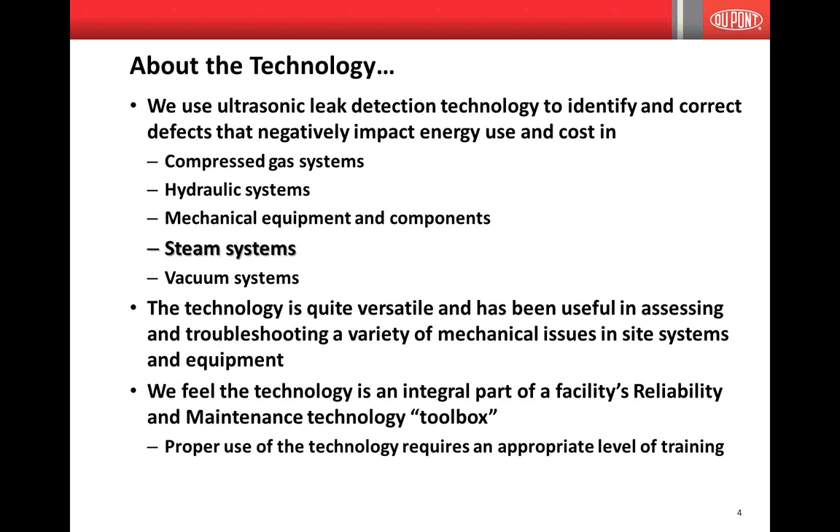So in doing this, the question we always ask is, who's looking at these systems on your plant sites?

In general, the primary purpose is to help our plants identify and correct defects. However, the perspective is more of a broader picture - items relating to other aspects of energy associated with these systems can be directly impacting manufacturing reliability, safety, sustainability, and mechanical integrity. Finally, we attempt to put into place the sense of awareness, the knowledge, and the tools necessary for sites to achieve the benefits and sustain the best practices.

So a lot of people ask what I do. Well, this is what I do.

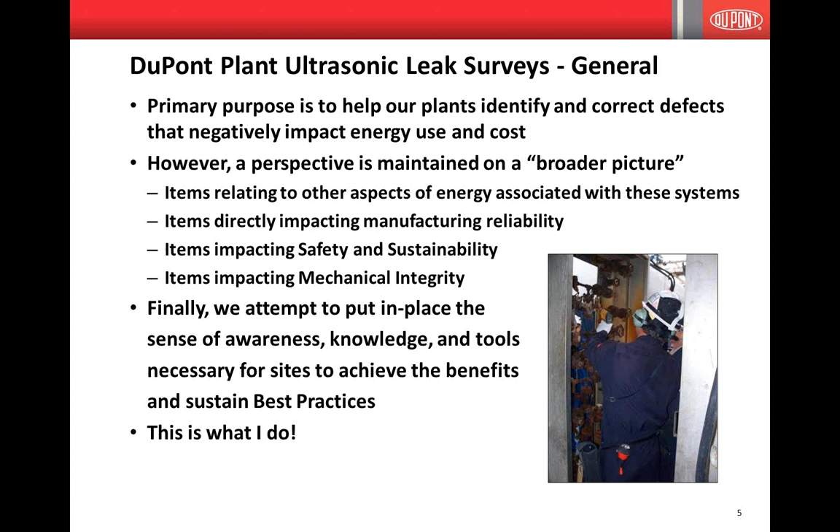The steam trap survey process can be very hectic at times. What we try to do is set up a steam trap database that's established and entered into an Excel spreadsheet. There are some computer-based programs out there in general that can be used, and there's a lot of good information you can get and store in computer-based programs, but right now, since we're going to so many different sites, and with the costs associated with that, we've decided to stick with our spreadsheets. Now, the spreadsheets we use can calculate everything that most of these computerized programs do, but it's a little bit different on the reporting side of it.

Typically, DuPont uses 2 of the 3 test methods for testing steam traps: sight, sound, and temperature. The two we basically use are sound, with ultrasonic leak detection, and temperature, which I use a little handheld infrared camera for. There's also contact-type spot infrared thermometers, but one thing when using infrared - you've got to watch the reflectivity off shiny objects, or you might not get true readings on temperatures.

But all the traps on site are surveyed. Again, I use intrinsically safe equipment - right now I have the UP9000 ATEX and the intrinsically safe FLIR infrared i5 camera. Once the defects are identified, I hang a red trap leak tag on the trap, and that's used to identify that there is a defective piece of equipment there. It also lets the people in the area know that there's an issue with this piece of equipment.

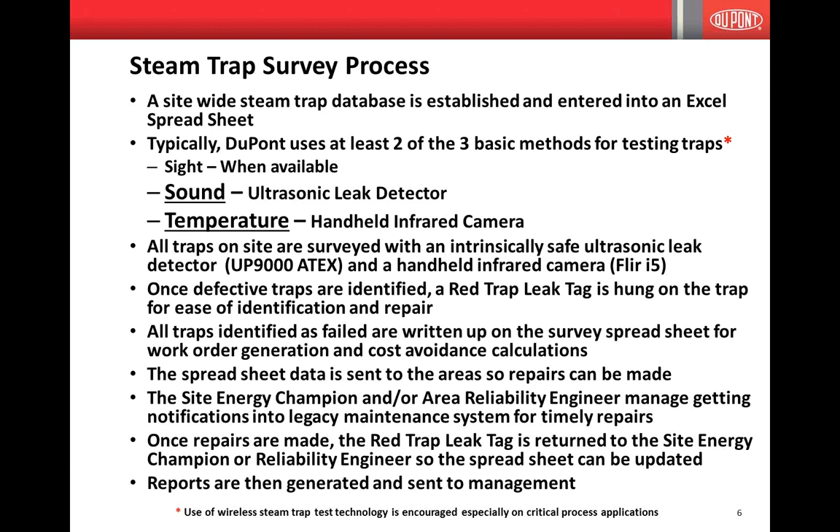Some of the equipment we use, like I said earlier, I use the 9000 ATEX, and this is basically the kit it comes with. Of course, I bought a bunch of fancy gadgets that go with mine for use within compressed air and steam traps - extension poles, flexible probes, and all. There's a wide variety of accessories that can be used with the equipment.

As you get more experience testing traps, or even doing compressed air leaks, you find needs for different modifications you may have to make, or make different things to assist you with doing your surveys. As you can see here, there are several detections, different leak detectors.

In this photo in the upper left-hand corner, you can see he's using a UP9000, but the headphone is not attached. If you can see my cursor passing over, this little jack plug is where the headphones should be inserted. I don't recommend testing steam traps without using the headphones.

In this case, he's testing thermodynamic disc traps, which have a distinctive on-off cycle. They can be very loud, and if you have your sensitivity adjusted a little too high with the headphones on and it discharges, it could be kind of uncomfortable to your ears.

You can still see the bar graph increase and decrease during cycles, but without the headphones, you can't listen to see if there's a leak in between cycles. A lot of times on disc traps, once the disc and seat start to get worn out, you'll actually pick up that slight leakage in between cycles, and that's when we start losing live steam.

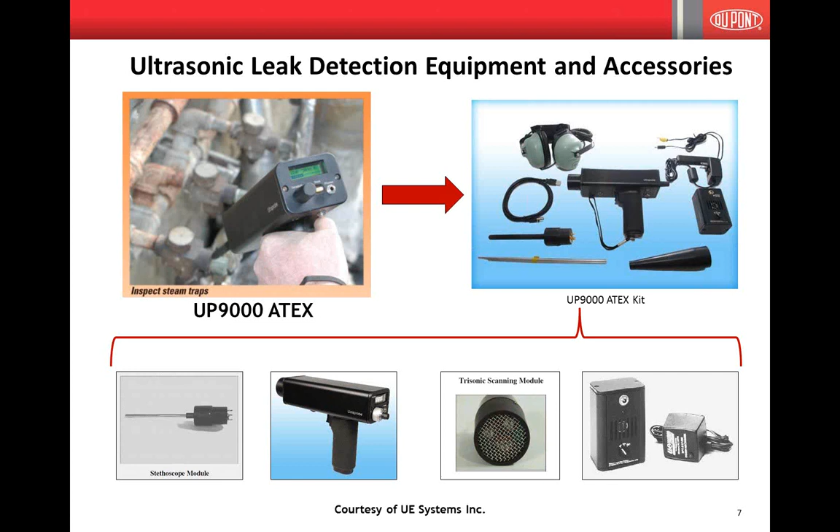On the bottom, you can see different scanning modules and tone generators that can be used for different types of testing techniques.

Steam systems within DuPont - I'm sure steam systems are not just for DuPont. Every plant site has them, every industry and business has them, no matter if you're a hospital, an oil manufacturing facility, chemicals, pharmaceuticals - just about everybody has steam. Everybody's going to have a steam generation facility.

There can be thousands of running feet of pipe within the steam distribution system, and hundreds to even thousands of steam traps on site. There's also a diverse mix of steam traps and trap applications, different pressures, different applications in the utilities and process areas.

In addition to the inefficiency and steam loss, other energy-related items associated with surveying these systems can include improving steam trap and steam condensate leak management via best practices. DuPont has an entire library of best practices that we use for any type of inspection, any type of program that we can use or have.

We're also assessing steam traps and associated steam and condensate piping. We want to make sure they're functioning - they can be failed open, failed closed, or any subset of the other observed conditions. We want to confirm the steam trap application, type, and installation. Visually examine the steam supply and condensate piping, the connections, the fittings, the insulation, and the ease and access of testing and maintenance.

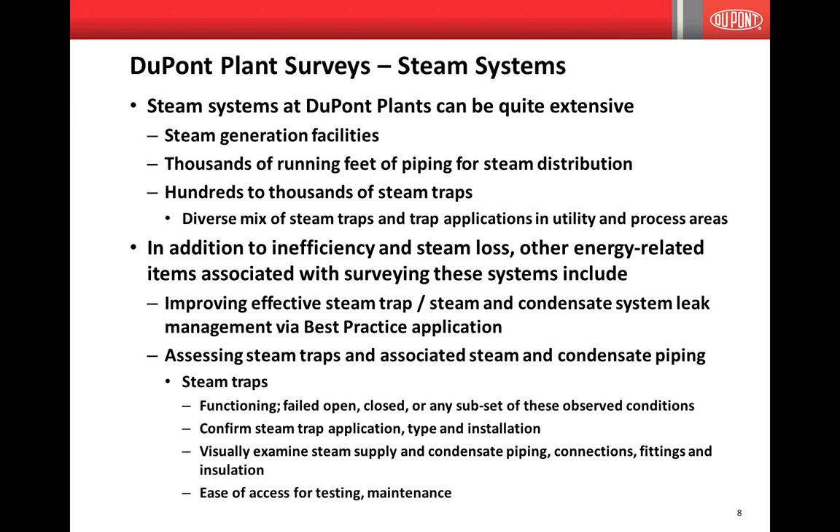Many years ago, we observed what we call the iceberg effect associated with steam traps and steam trap management. One thing we have to remember is that steam traps are only a small part of the steam system. But when we're having problems with steam systems, the steam traps are the first thing to get blamed that something is wrong.

In addition to energy-related items associated with these surveying systems, we also identify opportunities to reuse condensate in the area, like for flash tanks, heat exchangers, etc. Condensate is already hot, it's already treated, so you want to try to get that back to your boilers. That way you use less makeup water and less heat on it. So you save a lot of money by returning your condensate.

You also are looking to identify misapplication or poor utilization of the steam. These surveys also provide an opportunity to identify or assess potential safety design, system design, and mechanical integrity issues.

Safety, hydraulic shock, or water hammer. I'm sure if you've been around the steam system long enough, whether you've been at the plant for 40 years or you're on your first month, you hear some pinging and banging, water hammer in the steam headers. One thing you have to remember is water hammer is not normal. Steam systems should not be banging and hammering.

It could be because the system can't remove the condensate. It could be some traps that are failed closed. It could be an isolated valve that you can't see anywhere that might be leaking through or cracked open. There's a lot of different things that can cause water hammer.

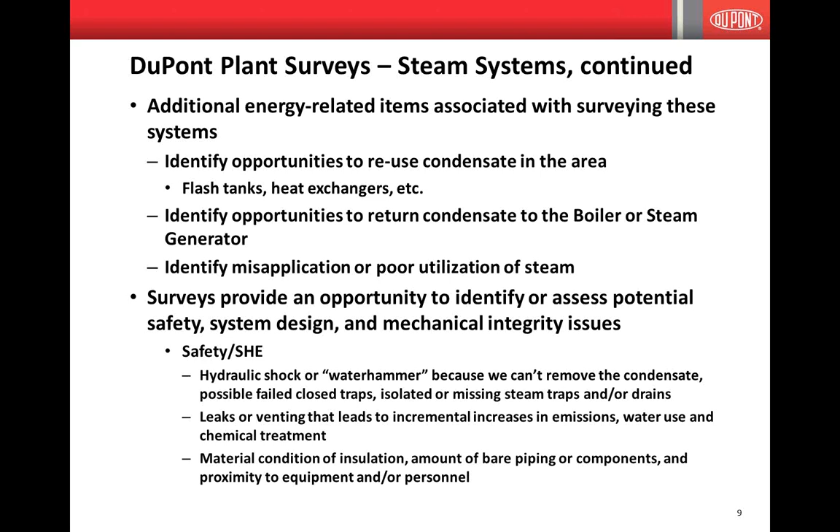When we start getting more water condensate in the systems, the temperature starts dropping, the pressure starts dropping. So there's a lot of issues that if we don't remove that condensate, we can have some serious equipment issues.

As far as mechanical integrity issues, system discharge points, flash steam in the proximity to personnel or vehicular traffic. You can have issues with thermal burns, either direct or indirect contact, steam plume or vapor clouds from flash steam and vented condensate, condensing vapor, pooled condensate, and potential for freezing.

Down south here in Louisiana, we don't have that issue that much, but up north, now that it's starting to get into the cooler season, we want to make sure that our systems are properly trapped and removing that condensate, because we can freeze up not only little tracing lines, but big steam headers as well.

There's a lot of noise associated with trap discharge and the erosion of the trap drain area associated with condensate discharge over time. Some mechanical integrity issues: you're going to have pipe and fitting corrosion, erosion from adjacent leaks or direct contact with other piping, and the location and condition of expansion joints, pipe hangers, and supports.

Some design issues can be adequate system or component isolation valves, sufficient system high point vents and low point drains, and adequate provisions for support and thermal expansions.

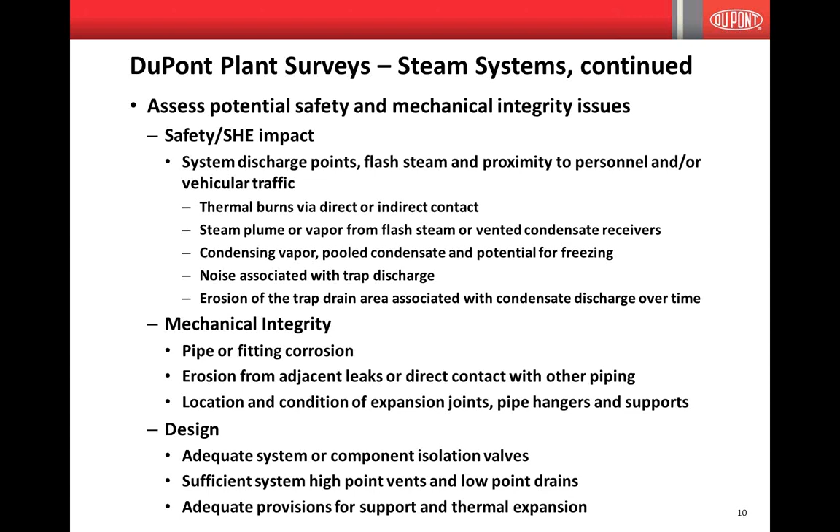During the surveys we also check for steam loss and steam leaks. The leaks add artificial demand to the system, or lose the opportunity of effectively utilizing or returning condensate, basically measured in pounds per hour. Leaks can lead to incremental increases in emissions, water use, and chemical treatment.

Pipe and/or fitting material conditions, material conditions of insulation, and the proximity to personnel. A lot of our plant sites are very old, and a lot of these old sites still contain some asbestos. So you have to watch when you're going around bumping insulation or removing valves or traps, making sure you don't disturb the insulation too much.

We look at the vents of flash steam in the proximity of personnel or vehicular traffic, again, which can cause thermal burns. Vapor clouds, once they get dense enough in the wintertime, you can't even see through them, so you don't know where you'd be walking. You could end up with a tripping hazard or something of that nature.

And the noise of the vented steam, which in some cases could sound like the space shuttle taking off. Mechanical integrity, the condition of the piping, the fittings, the valves, the packing, etc.

Again, we can document these things on a spreadsheet, where we're not only writing up a steam trap that's defective and getting a work order on that, but also writing up if there's a valve that needs to be replaced, or a valve packing leak that we can try to tighten up, or piping and fittings that need to be replaced as well. And the reliability aspect of it is, do existing mechanical isolation valves function properly?

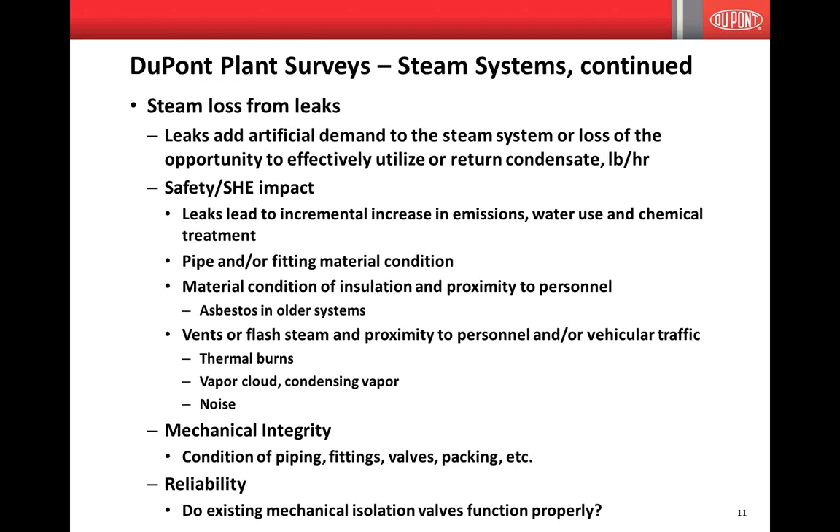The percent of steam trap failures - when we figure in failure rates, DuPont calculates the failure rate using only the traps that are in service at the time of testing against the number of failed traps that actually failed during that survey. I've seen some entities use the entire trap population versus what's failed, which can give you a false pretense of what you actually have going on out in your areas and in the units as well. What we like to do is make sure we get a failure rate of the traps that are actually in service.

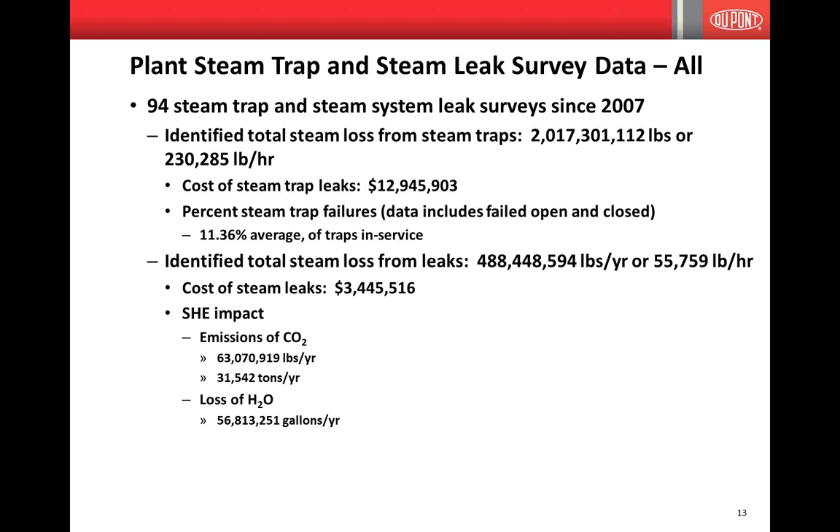Some of the charts I put together are since we started the programs and monitoring closely in 2007. You can see our failure rate chart. In 2007, it was an average of 14% failure rate. Some sites were as high as 35-40%. We didn't get below 10% on not many of them.

As we started getting in and putting the programs in place, you could see, like after 2009, when more and more sites started getting on board with the best practices and realizing there's a lot of low-hanging fruit, as we call it, as far as steam trap maintenance and repair to capture some of these wastes, you could see how the trend gradually went down over the years. Right now, on average about 2015, it's a little under 6%.

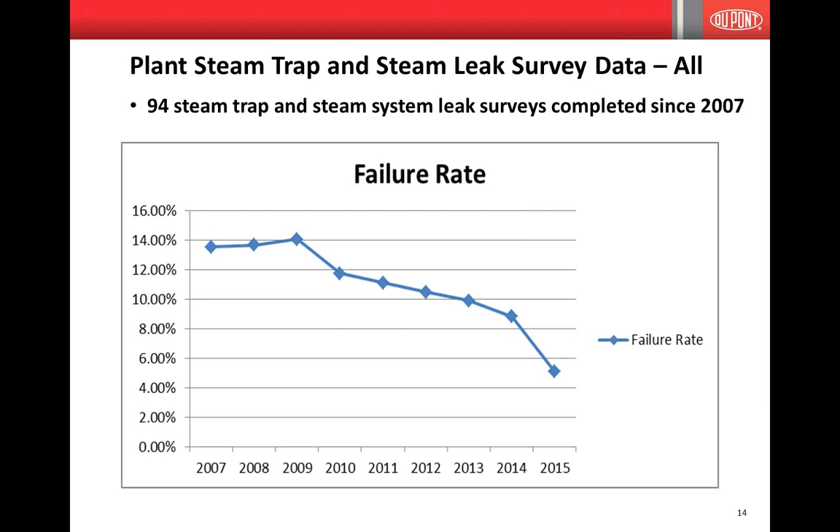We've only done a few surveys so far this year, so hopefully it doesn't get that much higher when I finish my next 6 surveys before the end of the year.

You can see the same here, the trend of the dollar amount loss follows the failure rate pretty closely. You'll see spikes in the trends with steam trap failures, most commonly during startup and shutdown of our plants. We need to have processes in place to blow down our steam headers and steam systems, because if we just start up and shut down without trying to remove the trash from the steam systems, we could basically just send that trash straight to the steam traps, and it's going to cause a premature failure.

So if we can put some processes in place when you're shutting down a steam system, get a group of guys together to have access to blow down the main headers, get all the sludge and trash out, and protect the traps by isolating them before you let all that trash go through. Same thing on startup: you want to purge your systems before you introduce that steam into the main process applications and to your main steam traps.

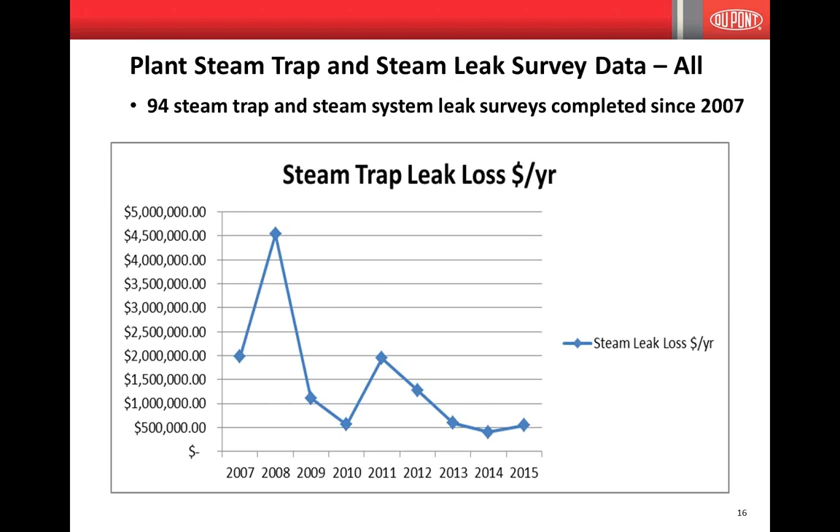Overall observations and defects: steam traps are a mechanical device. They will and do fail. There are two basic different types of failure modes: failed open and failed closed.

On failed open, we use three different leak levels on thermodynamic disc traps: full blow through, rapid cycling, or leaking. Within the spreadsheet we have a breakdown percentage-wise—if a trap is leaking it might only be wasting 30% compared to a trap blowing through at 80 or 90% of blow-through capability.

So we do get a little conservative on our leak rates. But when traps are leaking through, they're not operating properly and won't be efficient. This increases your steam use and/or loss of live steam, and increases your BTU per pound, a key performance indicator DuPont uses in tracking steam systems. We can also overpressure condensate return systems when a trap blows through into a closed loop system.

You're going to get water hammer and improper heat transfer, or the inability to maintain heat and throughput. If a trap is failed closed, we're not losing live steam, so we're not wasting money that way. But we end up backing up condensate into the steam headers and heat exchangers, causing poor steam quality and poor heat transfer, with possible water hammer. Once you start flooding heat exchangers, you get formation of carbonic acid, which causes corrosion and loss of mechanical integrity of the equipment.

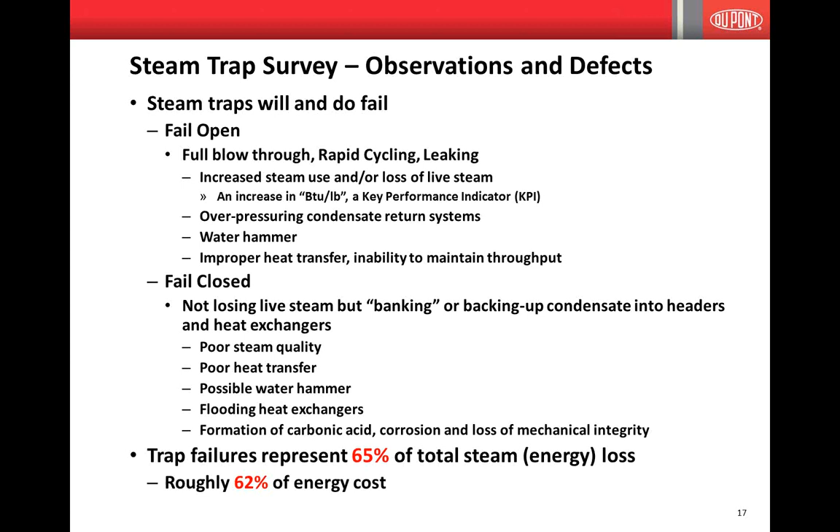Trap failures represent about 65% of the total steam or energy loss, roughly about 62% of our energy costs. Steam leaks represent about 35% of energy loss, roughly 38% of the energy cost.

Leaks from piping systems, fittings and joints include valve packing leaks, and strainer blowdown valves that leak through. A lot of people like to bleed off on the strainers before the trap to keep the system hot, but if we're blowing down steam before a steam trap, we're actually losing efficiency inside the equipment we're trying to maintain heat on.

We lose a lot of latent heat—the pressure drops, the temperature drops. So even though we see live steam coming out, it'll be hard to maintain our system pressures and set points if we're blowing down before the trap.

We'll see leaks at piping, tubing, fittings and connections. A lot of times tubing gets crushed, or fittings are loose and start wearing out, blowing through. It could be internal corrosion, external erosion, or friction from rubbing on pipes or tubing causing leaks.

Steam hose is sometimes used for surface heating instead of jacketed or tracing systems. There's a lot of waste when you open up a 3/4 inch steam hose just to blow it on a transmitter to keep it hot and keep it from freezing in wintertime. A lot of times the water on the transmitter will cause more headaches than it solves by trying to keep it warm.

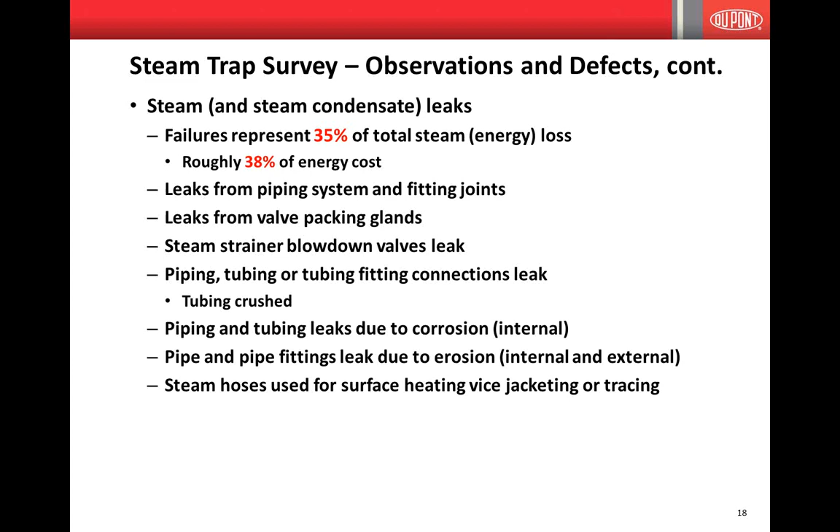Even with maintenance personnel, if they're not properly trained on how to install steam traps, they may take out a failed trap but install it wrong, putting it right back in the same way, and the trap will fail again.

If you're not familiar with each type of trap and trap technology, all traps are position sensitive when you install them, because they have to be in a certain position to operate correctly. So if we're not training our area personnel either how to test the traps or how to install them correctly, we're shooting ourselves in the foot by our lack of training.

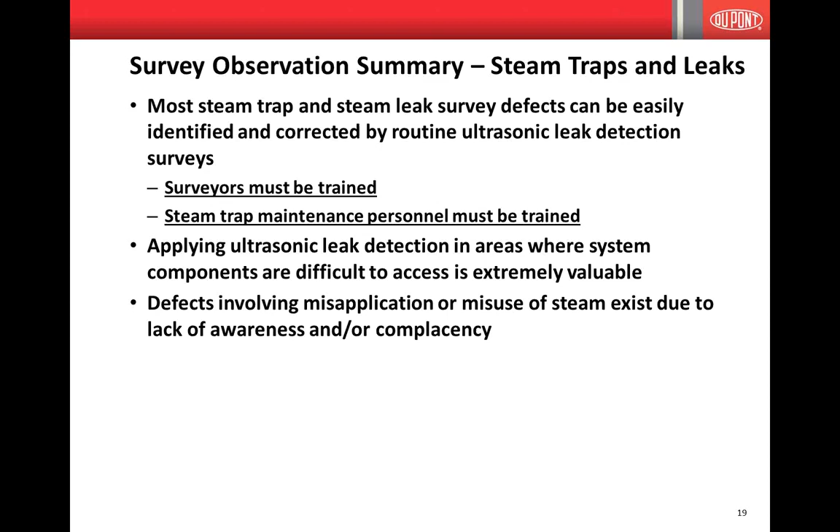Applying ultrasonic leak detection in areas where system components are difficult to access is extremely valuable, and defects involving misapplication or misuse of steam exist due to lack of awareness and/or our complacency.

Going into a little bit of the training we offer, it basically comes from UE Systems, where they trained me several years back. I got certified through their process and program, and I take bits and pieces of their training and put it directly into our field and hands-on training as well as classroom training.

We started this back in 2010, and we split it into 2-day sessions. Day one is ultrasonic leak detection, how to use the equipment, how to do airborne leak surveys. We go out in the field after lunch and do mini surveys.

We come back in the classroom or meeting room and discuss what we did. We share our findings. I'll show them how to use the spreadsheet to enter that data and show the calculations of the savings and potential cost avoidances of what we found in just a couple hours.

The money you can save in leaks found or defective traps found actually pays for that person's time, basically almost the entire year. So the payback on these type programs is unbelievable.

That's why I stress strongly that this should be a full-time job at every plant site, where, depending on how many traps you have, it could be 1, 2, or 3 people full-time doing steam traps and compressed gas leak surveys, and the plant will reap all the benefits they could ever think of.

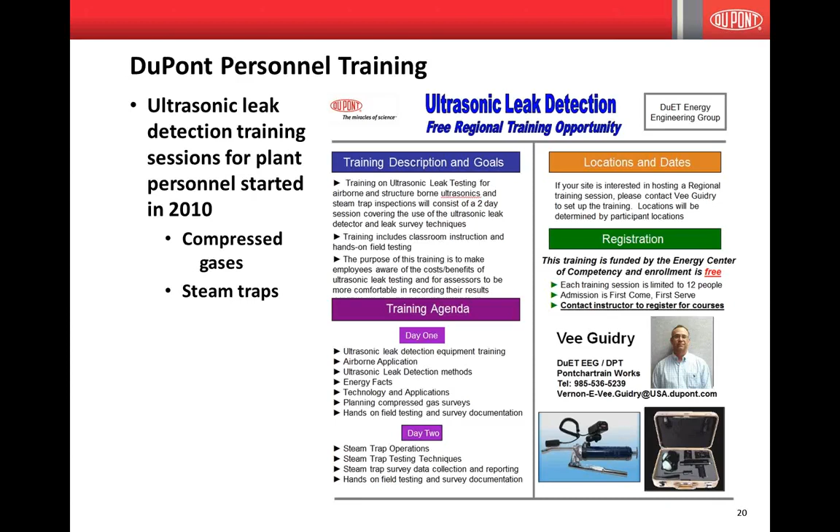That could be operators, mechanics, area engineers, supervisors, reliability technicians. I've had some plant managers sit in, unit managers, black belts. I like to have everybody attend the training sessions just to get that bug in their ear saying, hey, we really need to do something on our steam system.

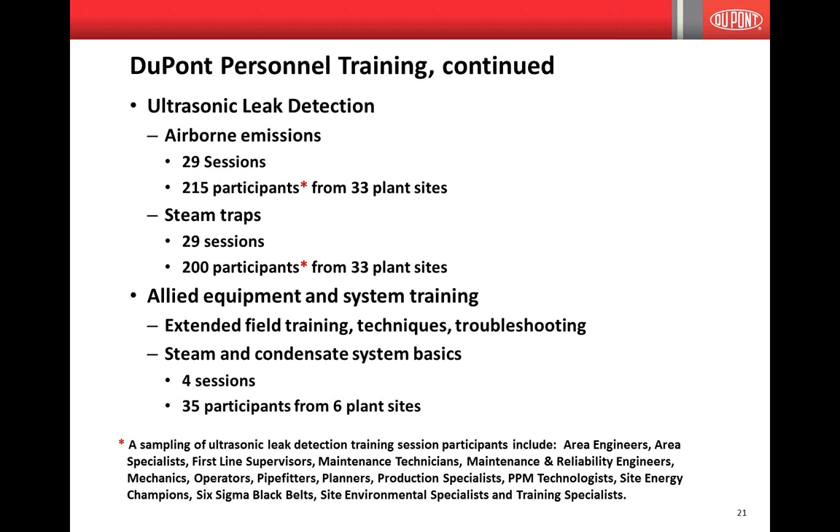You know, we go to look at it. We try to figure out, write a list of everything we find wrong, or the what-if chain that we go through. It helps me understand their process, but I can help them understand the steam side of it. DuPont has a lot of experience and expertise in different fields throughout our process and applications, so we have a wide array of folks we can go to for different types of issues or experiences needed.

...program here within DuPont to where we have it broken up in each region - Gulf Coast, Mid-America, Southeast, Northeast region. I have a distribution list, an email list with over 300 names on it, combined across all the different regions. So if I have something I want to put out to the network, I just write one email and it flies through to everybody. They have questions or whatever, they email me back.

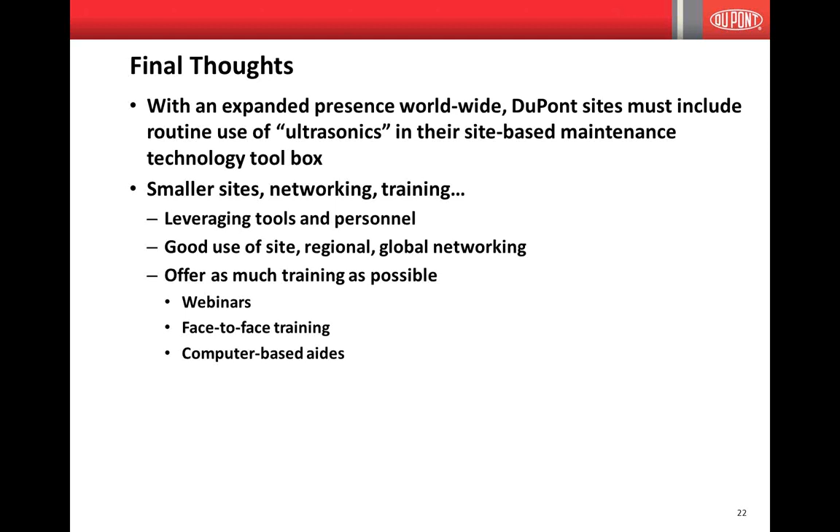And that's how I get a lot of work - sites starting to have problems with different things. We can put memos out and they can request services, and we can go through and provide the training and surveys that's needed. We also offer webinars, face-to-face training, and some computer-based aids.